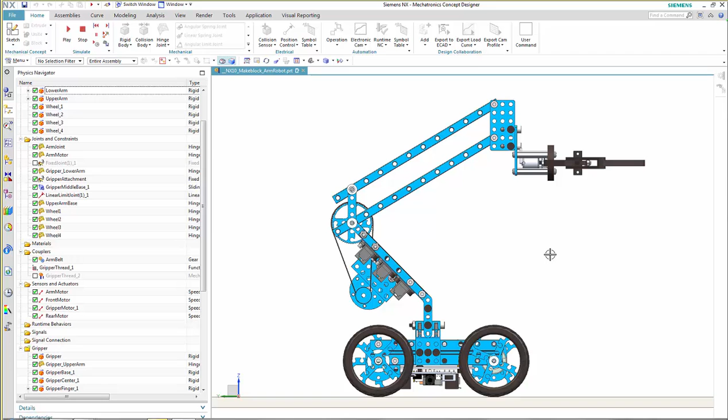This robot is modeled with MCD. When I switch on the MCD simulation, you can see that the robot basically falls down a little and is now standing on the ground. When I zoom out a little, you can see that I can just pick the robot and pull it around.

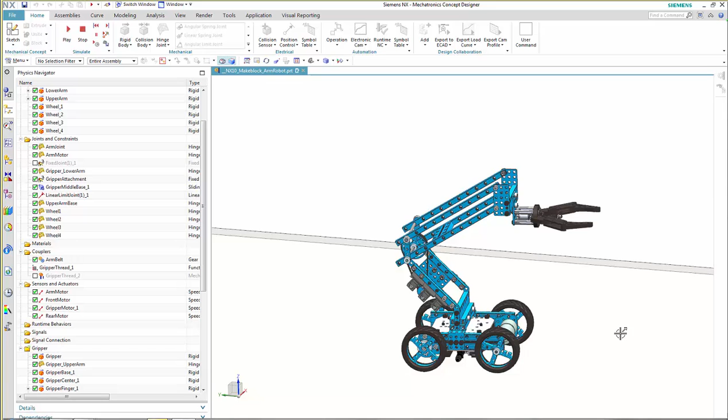That's why MCD has a physics engine. Now I'd like to show you how you can operate this robot using the speed controls. We have 4 speed controls built in. The robot has a motor attached to the left front wheel, and another motor attached to the right rear wheel. Then we have a motor which drives the arm up and down, and another motor which closes and opens the gripper.

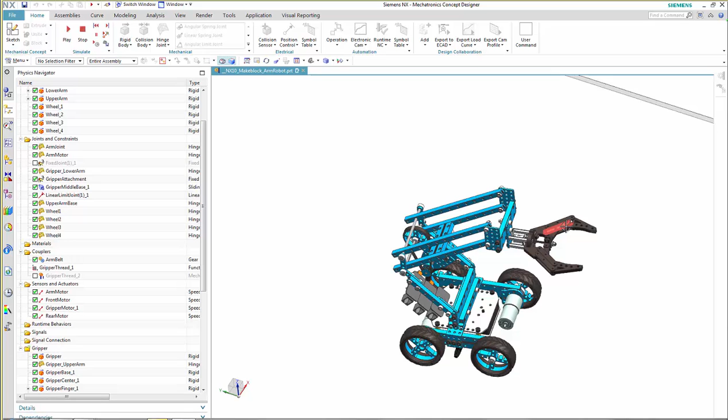These 4 objects I can click on during simulation in MCD, and this will put these objects over into the so-called runtime inspector. This runtime inspector allows me to manipulate the MCD objects during runtime.

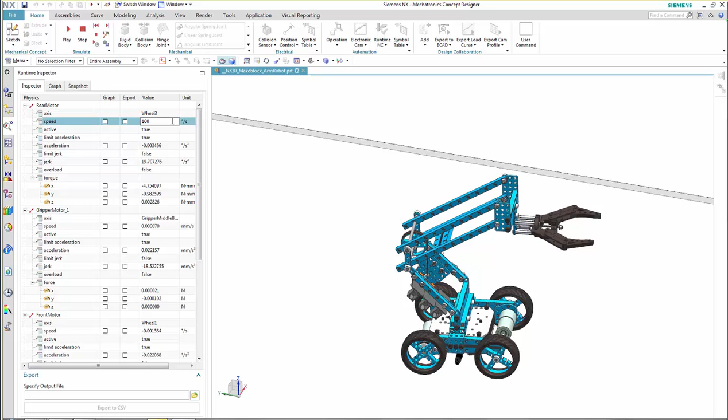What I'd like to show you now, for example with the rear motor, is that I can just enter a speed. So now this would be 100 degrees per second. And of course I can also switch it off again by just entering 0.

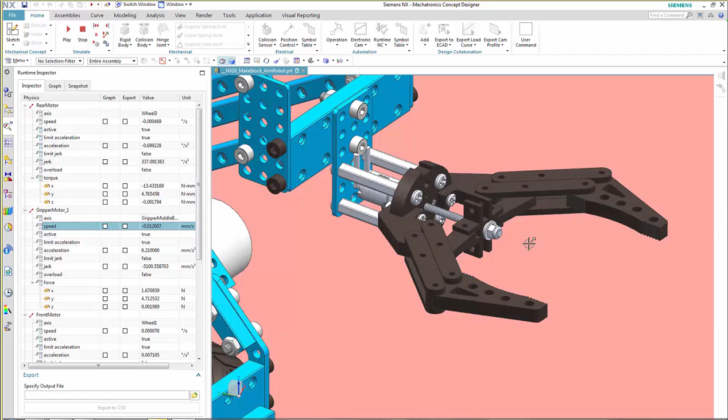The same works for the gripper motor. If I just enter a number here, we can see that the motor is pushing the mechanism against the mechanical limit. If I invert the movement, you can see that the gripper is closing, and when it's closed we also have a mechanical limit so that it cannot push any further.

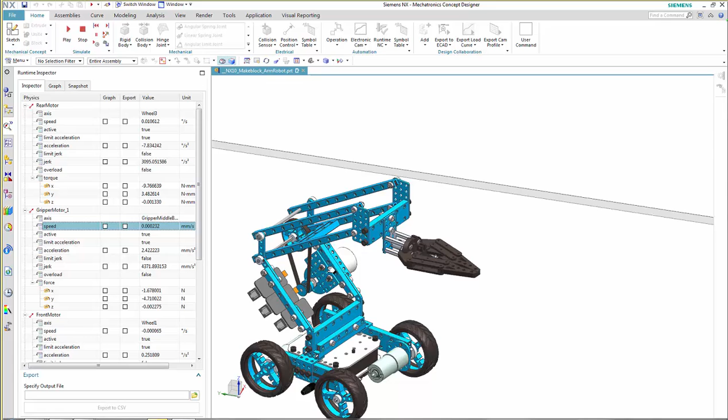Now I would like to show you how I can move the arm up and down. This movement, for example, is not limited right now, so I have to switch it off by hand.

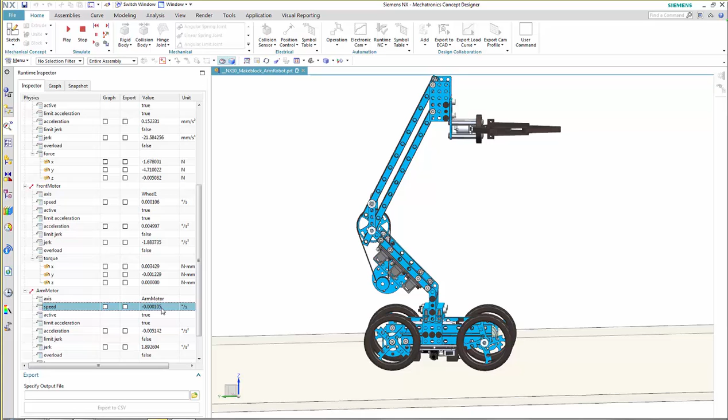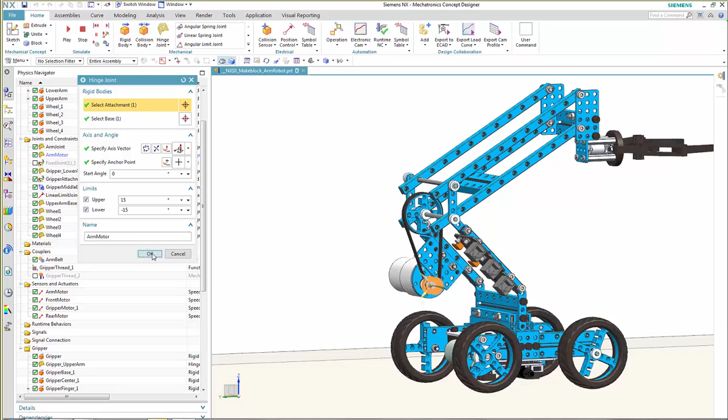If I would want to limit it by a joint limit, I can do so. Just entering again the physics navigator, picking this joint, which is the arm motor joint. Here I can introduce a limit, an upper limit and lower limit. For example, by putting in 15 - of course that's a pretty small limit, but it will show us how the movement is going to be limited.

When I start the simulation again, and switch over to the runtime inspector, entering a value to the arm motor, I can see that the movement is going to be limited after reaching the specific joint limit.

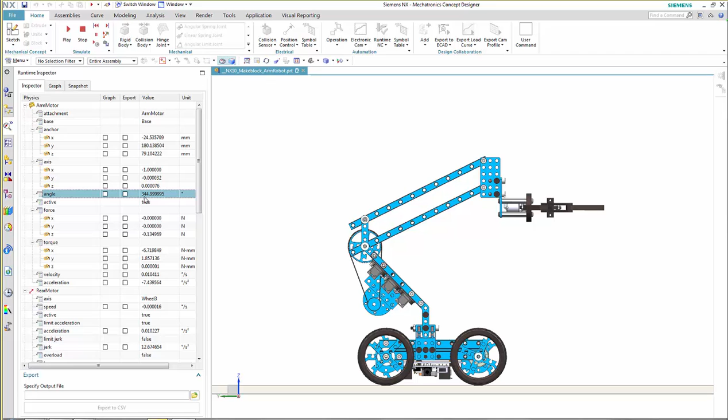For example, to check this, you can just click on the hinge joint of the arm motor and look at that hinge joint within the runtime inspector. I will see an angle here which is about 345 degrees, so that's exactly the minus 15 degrees limit.

And when I now drive the arm motor again up by 10 degrees per second, I will be able to see that we now have an angle of about 15 degrees. Thank you.